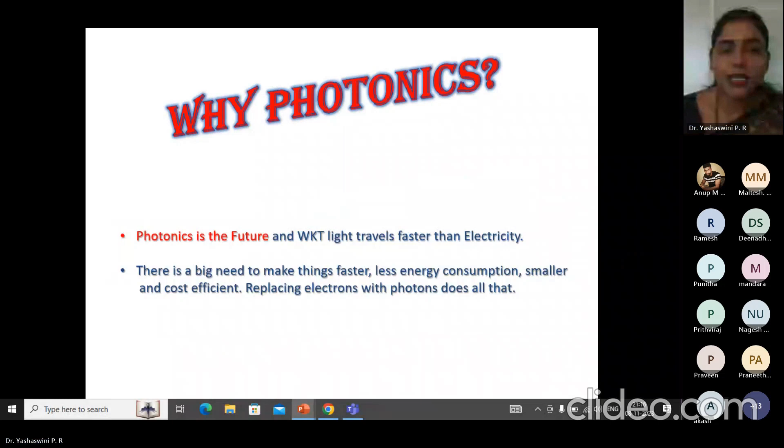applications starting from lasers to photovoltaics, light emitting diodes, and integrated photonics. Photonic sensors are among the greatest applications of photonics. In today's session, we'll see the design of a photonic crystal based pressure sensor. Coming to the basics, photonic crystals are periodic dielectric nanostructures that manipulate the propagation of electromagnetic waves.

Photonic crystals can be used to design various sensors like pressure sensors, biosensors, temperature sensors, and the list goes on. For pressure sensors, the photonic crystals are integrated with MOEMS. MOEMS are micro-opto-electromechanical systems, structures in the micro to millimeter range whose purpose is to manipulate light, with the ability to sense, control, and actuate on the micro scale and generate effects on the macro scale.

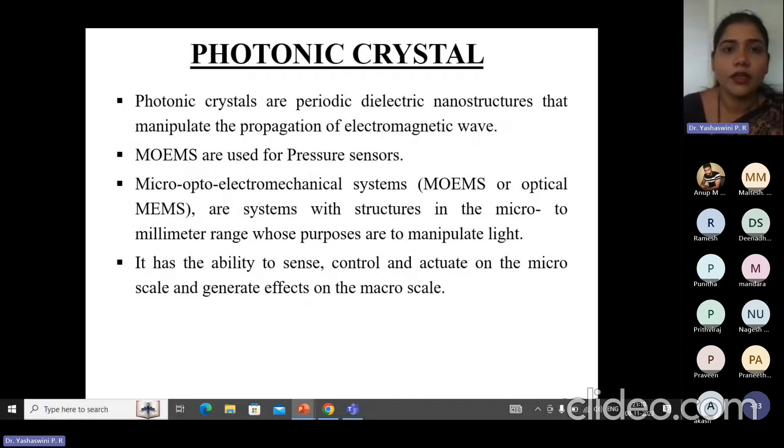Next, the types of photonic crystals. They are created by a periodic arrangement of dielectrics in certain directions. In the first figure, the one-dimensional photonic crystal, the green box is a layer of dielectric A and the blue box is dielectric B, periodically arranged. Depending on how many axes have the dielectric placement, a photonic crystal can be one-dimensional, two-dimensional, or three-dimensional, as shown in the diagram.

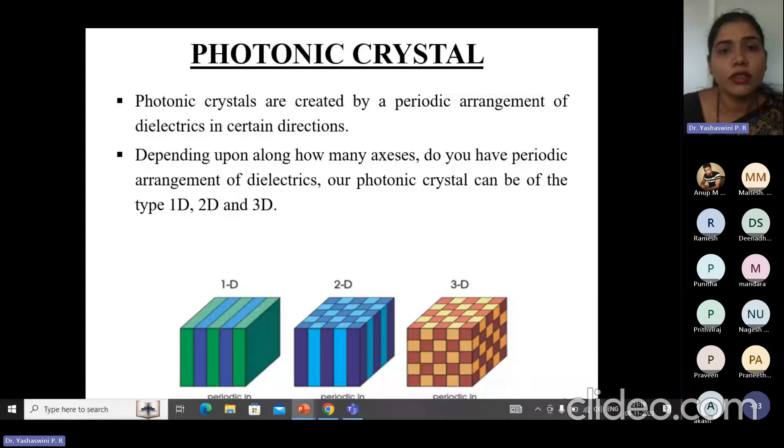There are basically two types of photonic crystal configuration: rods in air and holes in slab. In the rods in air configuration, rod-like structures are created on the photonic crystal to form a waveguide. In the holes in slab configuration, instead of rods, holes are created in the photonic crystal to form the waveguide. So these configurations are used to create the waveguide.

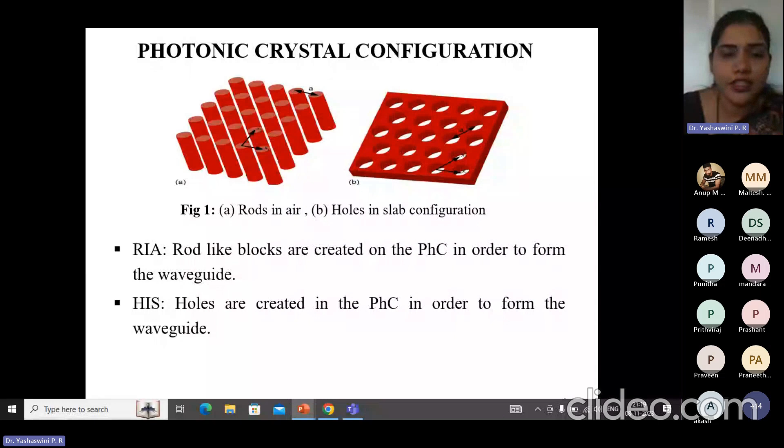Coming to defect engineering, it is an important concept in photonic crystal structure design. It is used to manipulate photons, controlling their propagation in the proper direction. It is used to get whatever structure we select; to prepare that structure, we use defect engineering. In defect engineering, we have point defects and line defects.

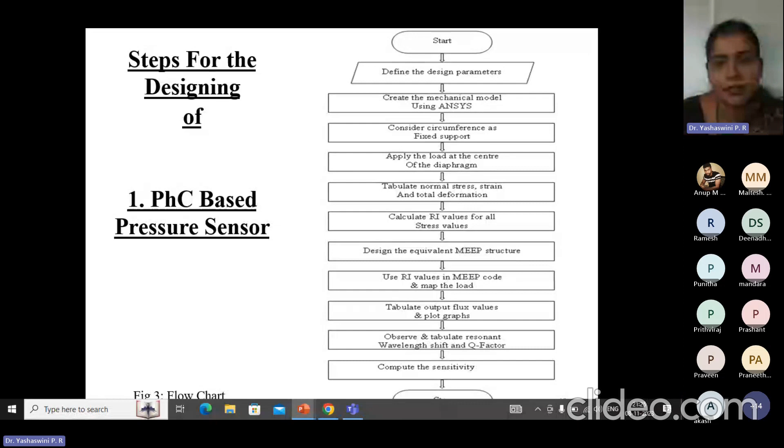So the first structure that I have considered is a hexagonal ring resonator. This is done using MEEP. First I tried it for one optical ring resonator, then the work is extended to double and triple ring resonators. Here are the design parameters that I have considered for the hexagonal ring resonator structure.

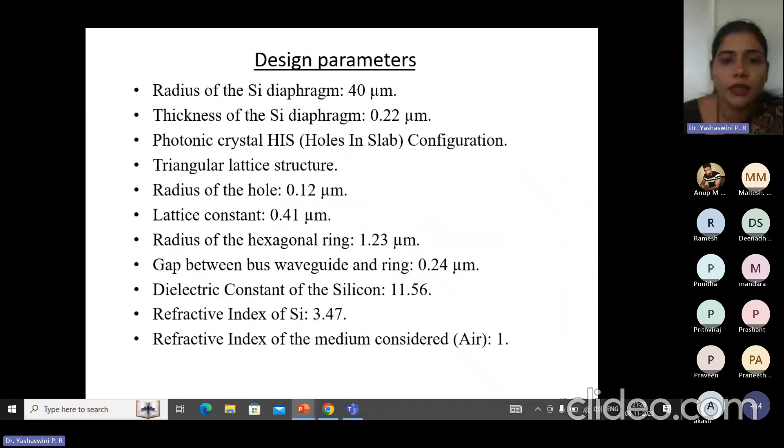So some thickness will be given to create that 3D structure. We have to give this thickness. So this is the one ring, two ring, three rings with silicon.

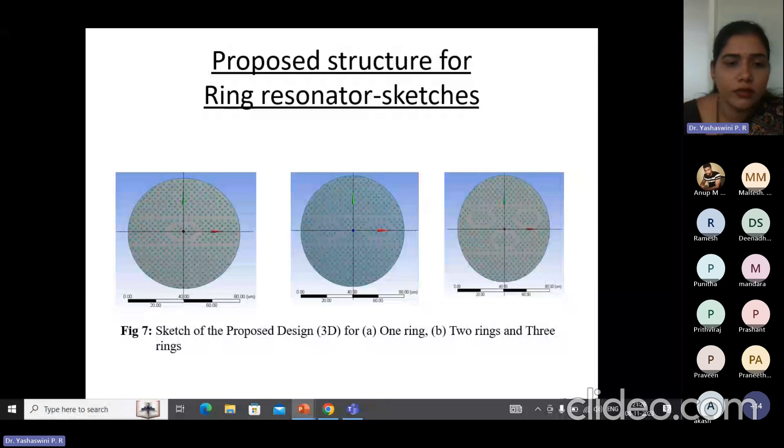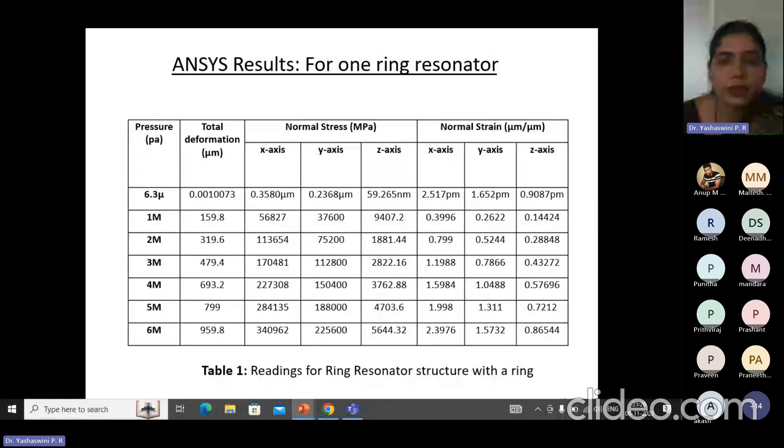After that, model circumference is fixed, and these are the ANSYS results - deformation, stress and strain in all directions. So basically for the calculation of effect we consider only this, for one ring, two ring and three ring resonator.

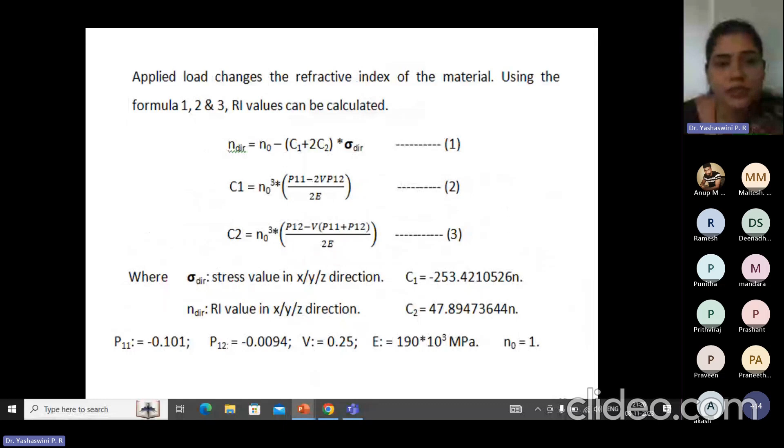So actually for one ring, two ring and three ring, from 0 megapascals, we have calculated the RI value for one ring, two rings and three rings.

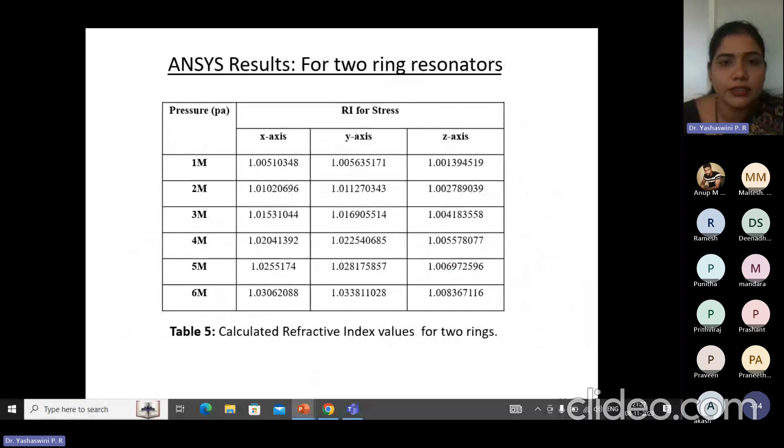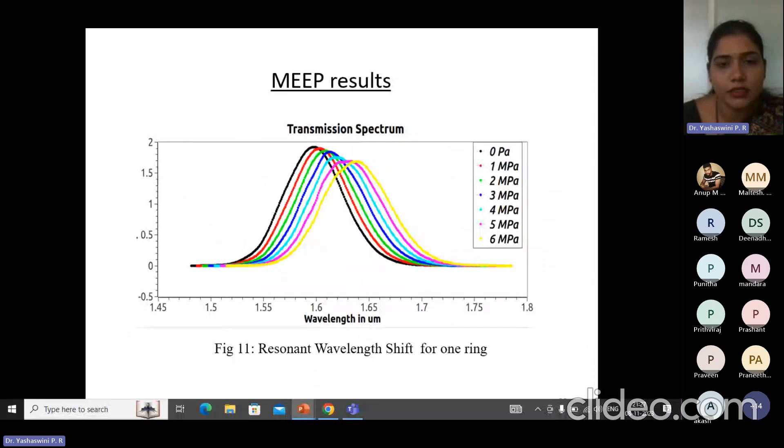So this is the MEEP results, that is the resonant wavelength shift or the transmission graph, for different pressures we have different kind. It is for one ring, two rings and three rings again.

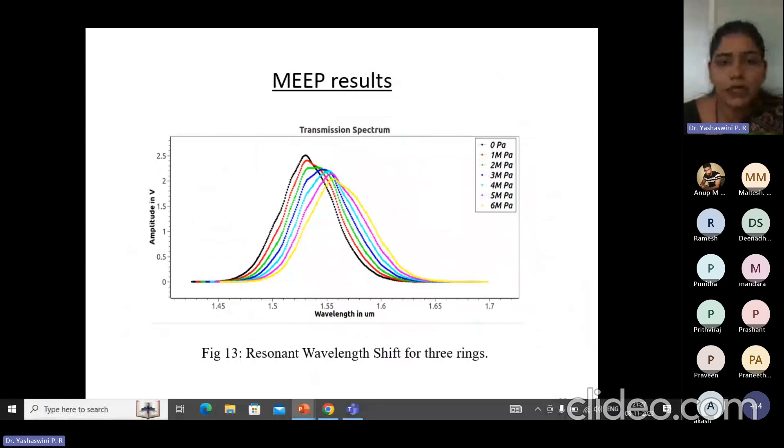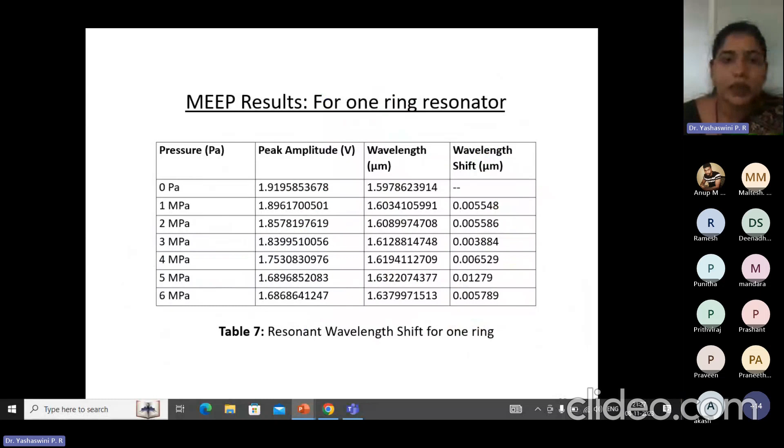So by using this transmission spectrum, we can identify the performance parameters like quality factor, sensitivity. By using these graphs, or directly in MEEP it will be given. Here you can see the MEEP results which includes amplitude, wavelength and wavelength shift for one ring, two ring and three rings. This is done to show that some wavelength is getting shifted.

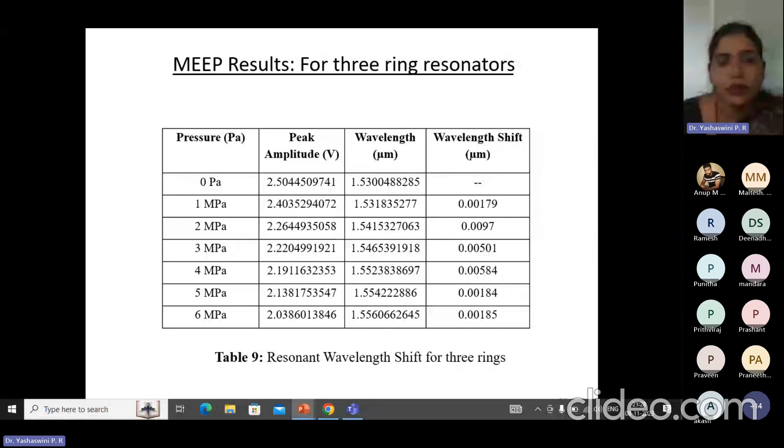So here the sensitivity, maximum sensitivity obtained is 450 nanometer per RIU and the Q factor obtained is 12,245. Here you can see the results of one ring, two ring, three ring structures. Both the quality factor and the sensitivity are tabulated.

These structures are referred from a referral paper. From that paper, we can see that the quality factor was around 2000 there, but the quality factor in our work is increased exponentially.

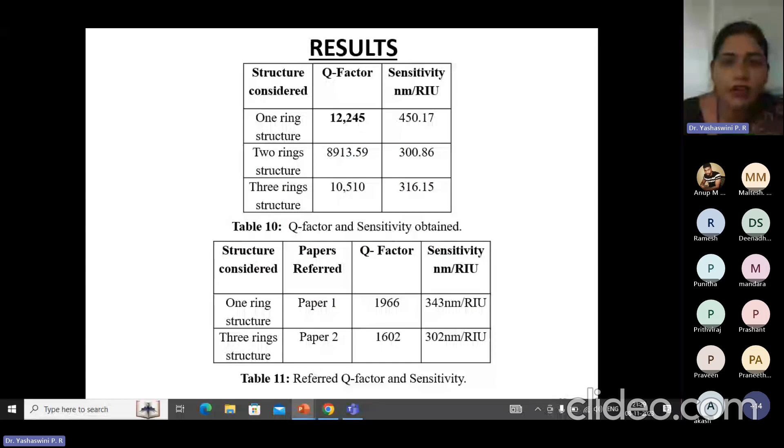So then for the same hexagonal structure, I designed using the MEEP tool, and quality factor was around 12,245. The same structure and design parameters are modified, and I have done the analysis by changing the radius of the holes.

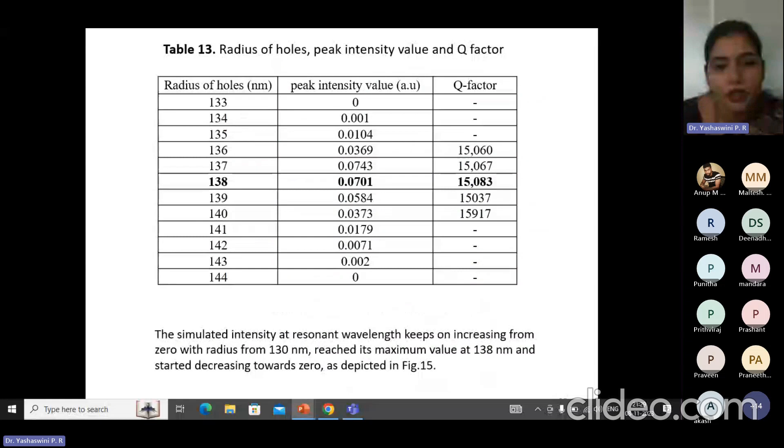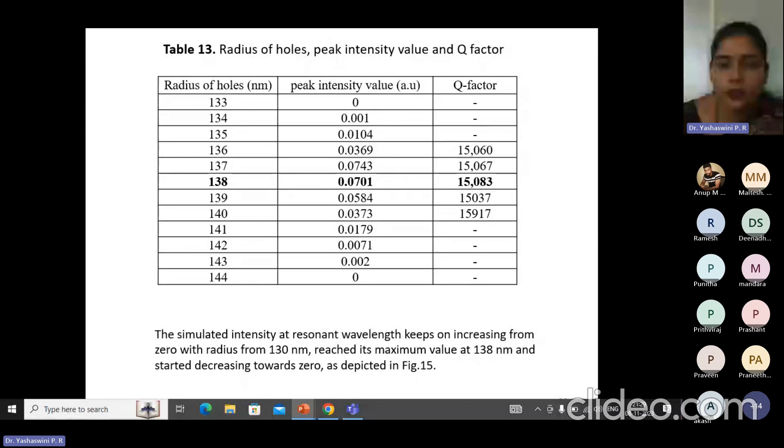I varied it from 130 nanometer to 145 nanometer, and I got the maximum values of quality factor at 138 nanometer radius of holes. At that particular value, I got the quality factor of 15,083. This is the graph of intensity versus radius of the holes.

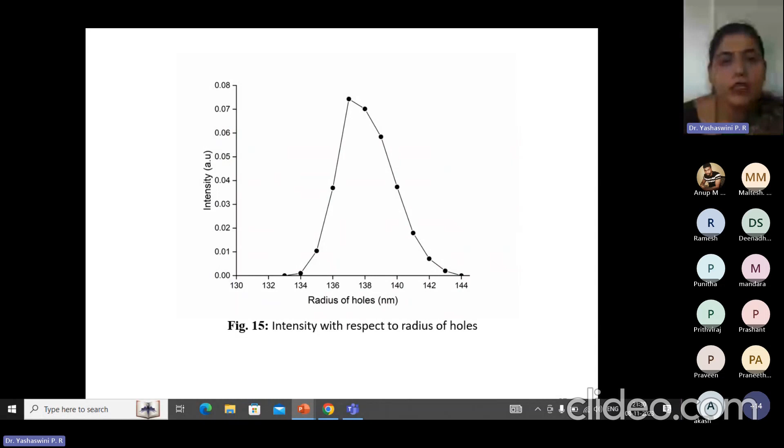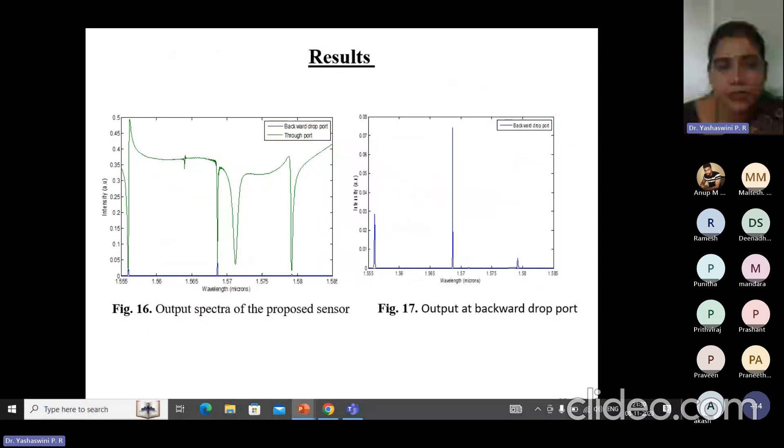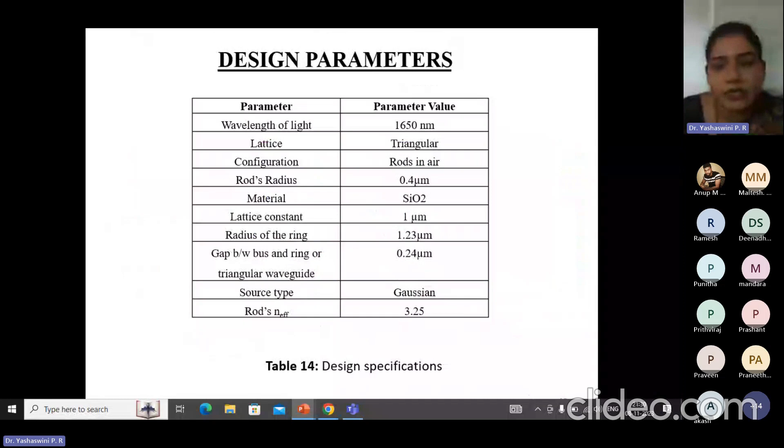So this is done using the RSoft tool. Similarly, so the first one is done in MEEP, the second one which I explained I had done in Lumerical, and this is using the RSoft tool.

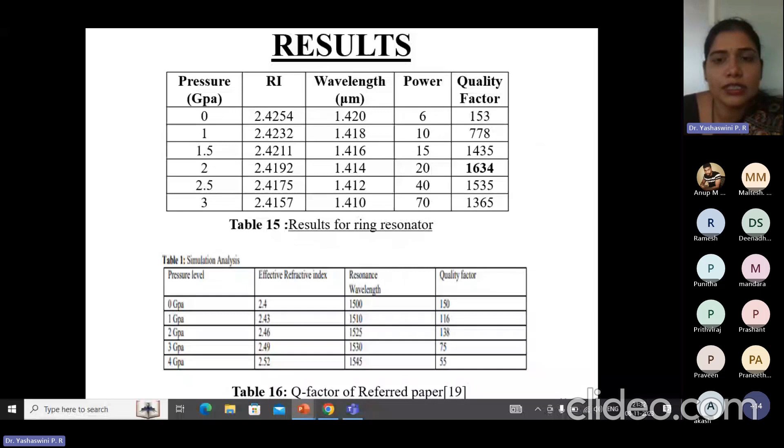Now for the ring resonator, we can see the maximum Q factor is from 1634 onwards, but the maximum Q factors we are getting here are from 2 to 3 gigapascal. We can see from the table that from 2 to 3 gigapascal, the Q factor is highest, so ring resonators work well in this range.

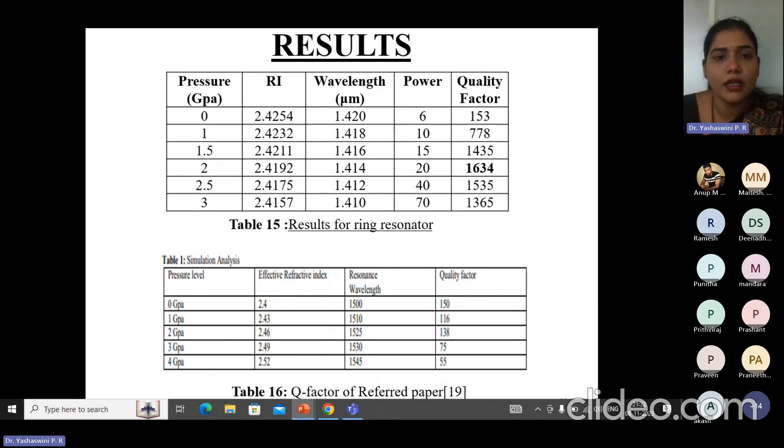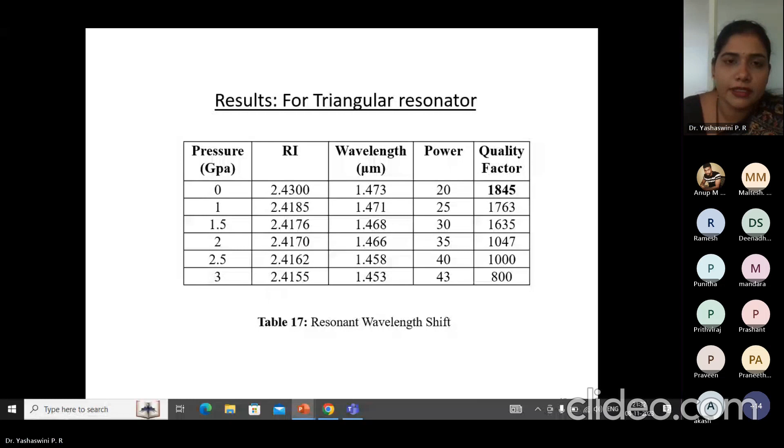Barotrauma means there is excessive stress on the eardrum because of a change in pressure range, causing an issue called barotrauma. This is a main issue for scuba divers and skydivers when there is an extreme change in pressure, which affects the eardrum and ruptures it. This is actually quite a big problem for scuba divers and skydivers.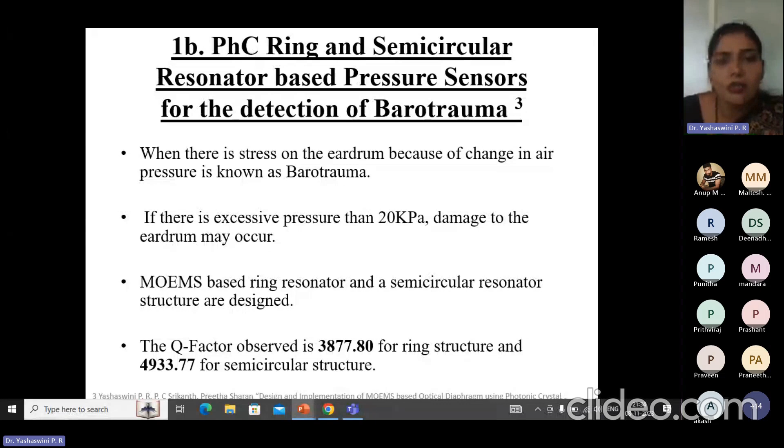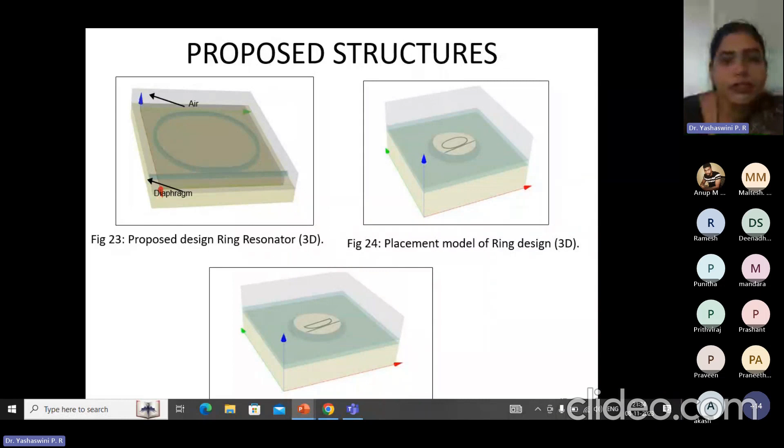Here also we came to a conclusion that the ring resonator structure is a little less compared to the semicircular structure. This modeling is done using an FEM tool called JCM suite. Here we can see the resonator structure in 3D for both the ring resonator and semicircular resonator, along with the design parameters considered and the simulation results.

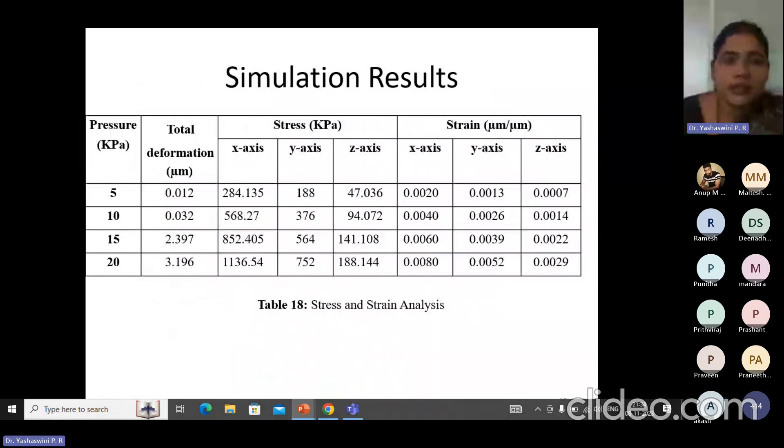Similarly, stress, strain, and deformation values will be there, and then we calculate the amplitude shift and the ring and semicircular design. Here you can see the transmission spectrum for the ring and the semicircular structure.

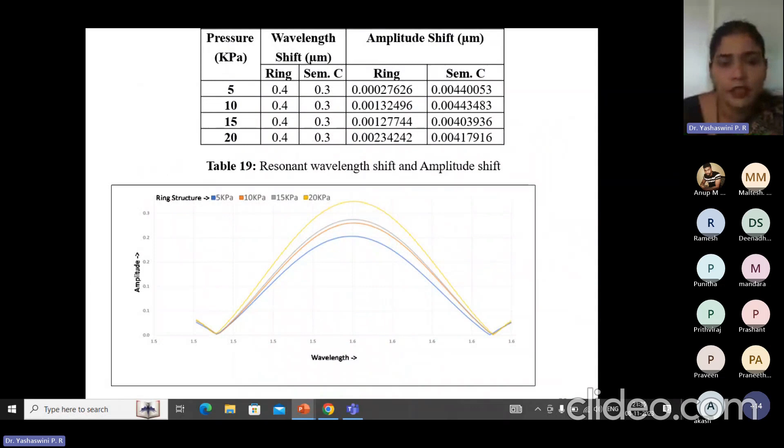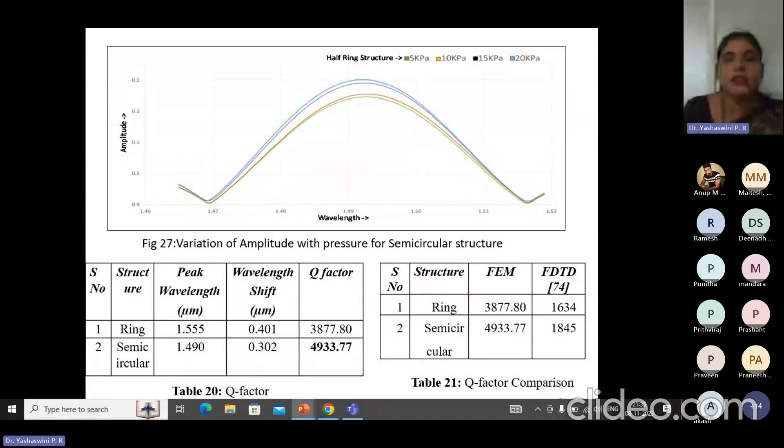Then for the 0 to 3 gigapascal range, we came to know that the triangular resonator provides good performance between 0 to 2 gigapascal, and the ring resonator provides good performance between 2 to 3 gigapascal.

And finally, for the application of barotrauma, that is to sense pressure in the range of 20 kilopascal, the semicircular resonator structure works well, and it is done using an FEM solver called JCM suite.